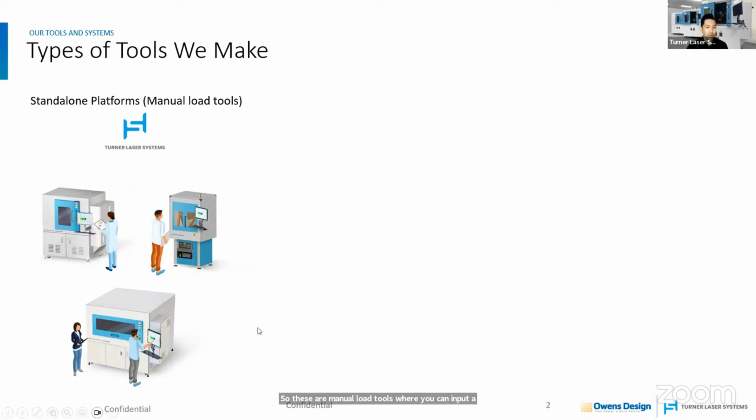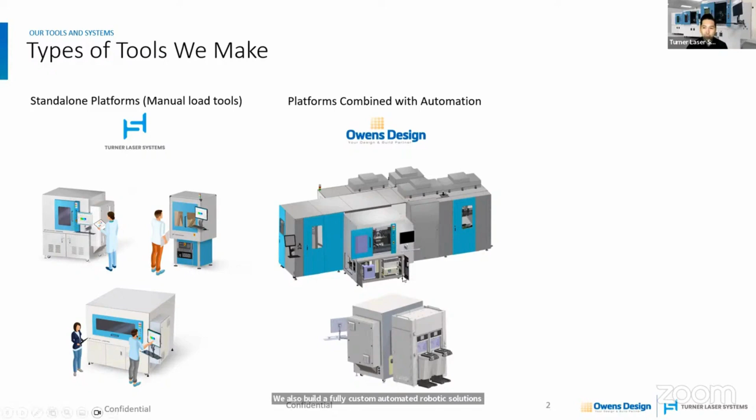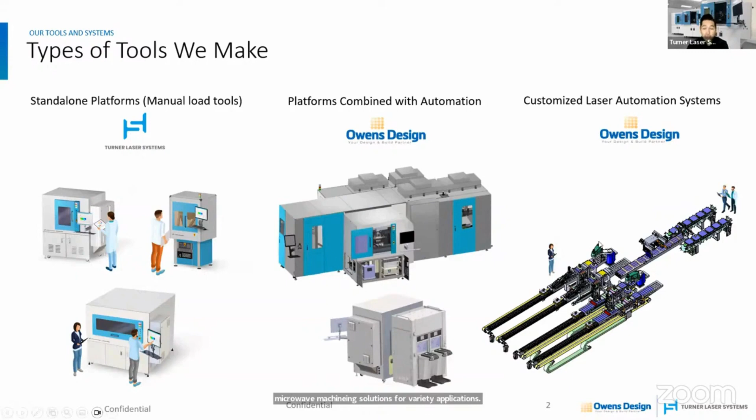Just very briefly, the types of tools we make: standalone laser micromachining tools. These are manual load tools where you can input a wafer or a sheet of material. We work with medical devices and a variety of different materials for micromachining. We also build fully automated systems. Often these standalone tools are then partnered with things like a wafer front-end module if you're working with wafers or solar cells. We also build fully custom automated robotic solutions to be used with these laser micromachining systems, and we can build fully 100% customized laser micromachining solutions for a variety of applications. It really depends on the application as to what type of equipment would be best to support it.

One of the wonderful things we see here in the micromachining space is that it gets to serve a variety of different industries. Based here in the Bay Area of California, we see a lot of work with medical devices, particularly medical implants, and semiconductor applications. Battery is a very hot area right now, where we're seeing a lot of new, very challenging materials to process, and micromachining has a huge role to play in the battery and energy industry as well. For solar manufacturing, particularly scribing and dicing of solar cells, we're seeing a lot of micromachining applications there. And of course consumer electronics, display, VR, AR - they all have manufacturing challenges that leverage micromachining today.

The types of lasers, optics, and processes we work with cover a long list of applications. At Turner Laser Systems, we primarily work with femtosecond lasers and picosecond lasers, so it's great to see a lot of conversation here today on those. But we still do a lot of work with nanosecond, fiber CW, and CO2, often as a complementary laser source to the ultra-fast lasers. The types of processes we do involve many different types, including ablation, cutting, dicing, drilling, etching, micromachining, and welding, to name a few of the core processes we work with, across a variety of different form factors.

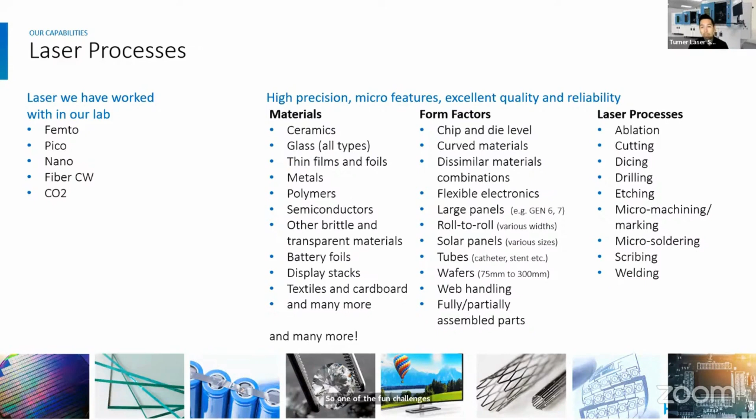One of the fun challenges we have in the automation space is working out how we not only use the lasers, but how we bring the materials and handle them in unison with the lasers, and bring it all together. Something I'll talk about a little differently today, instead of diving deep into the types of applications and processes, is a bit more about the philosophy for how we approach this. I think this is very complementary to the discussions we've been having today on optics and lasers: how do we go from having this application - maybe we were just talking about glass cutting before and using different optics there - to a solution ready for 24/7 industrial manufacturing?

One thing I'd like to share with you today is our phased approach, which we highly recommend using in the industry, because there's often a big gap between a quick test done in a laser lab or applications lab and having the solution ready. We often like to break this into critical phases - really a program management approach where we look at the risks and all the challenges that manufacturing would have. This is a really critical step.

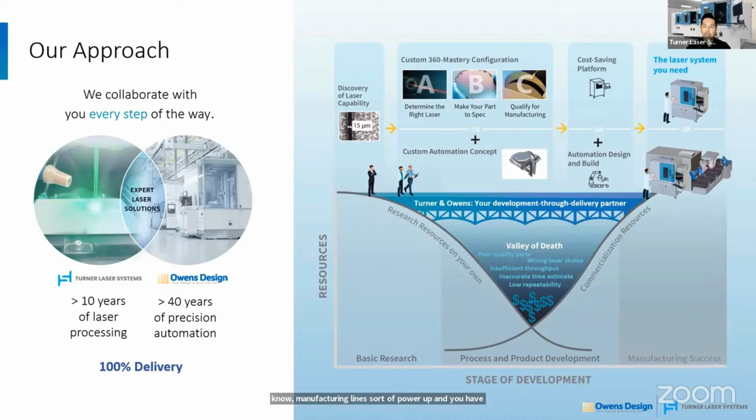We don't just look at the laser processing side of things; we also look at the manufacturing side as well - things like how materials are going to be fed in a manufacturing environment, whether we have tolerances to the materials, different thicknesses of materials as you go from batch to batch. These are all really critical nuances in manufacturing that are important to understand, and we really recommend those of us in the laser industry work very collaboratively with automation. This will be a critical step to avoiding the infamous valley of death, where manufacturing lines power up and the equipment is running, but the laser processes and systems just aren't meeting specification if you don't consider things carefully.

So we have a methodology for doing this at Turner Laser Systems and Owens Design, and this is really based off of a 40-year process that Owens Design has built, where they look holistically at the technology, manufacturing, and business needs of a specific application, and then we break it down into critical phases.

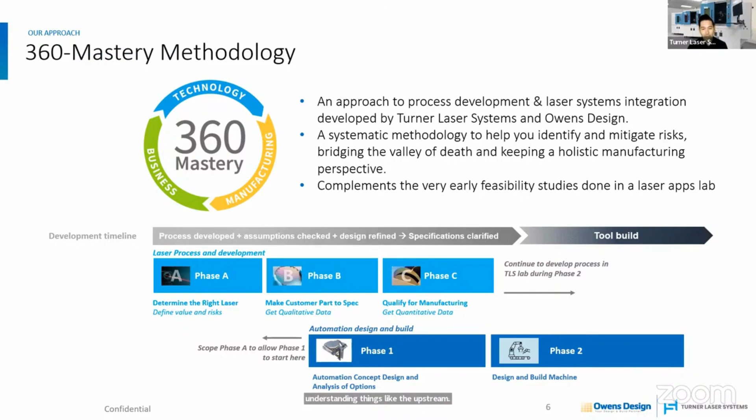Often we'll develop these laser processes, trying different optics, different lasers, different setups, fixturing, airflow. They all make a big difference. A lot of the time we'll develop that in parallel with the automation, and they go hand in hand. A critical thing we've learned in years of working with Owens Design is not to develop process or laser technology in a bubble, but to work collaboratively with your automation teams, understanding upstream and downstream process needs. This has led us to great success in deploying these solutions in large volume manufacturing.

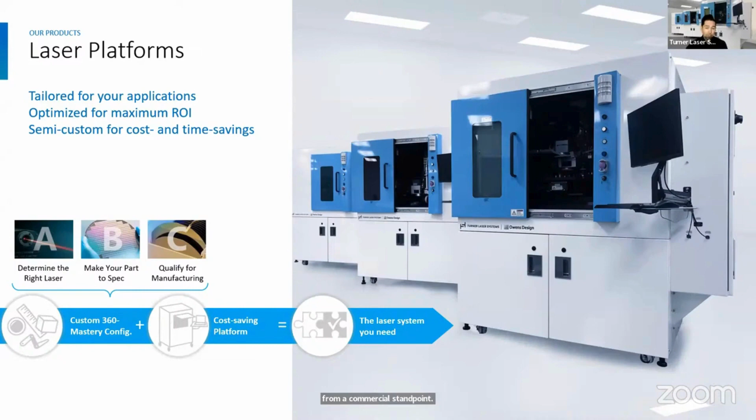Just a little bit about our laser platforms. We're a custom laser machine builder, so we tailor these machines to the application. What we're trying to do is select the appropriate laser optics for the application to maximize the ROI from a commercial standpoint. A lot of the work we do in developing these phased development projects goes into that tailored configuration in all of our machines.

Here's an example of one of the machines. I think Dr. Reddy was asking about glass cutting - this was actually a machine we built that had glass cutting built into it. This was for a medical application, wafer scale, also doing via hole drilling, glass-to-glass welding, glass-to-metal welding, and some ablative processes as well.

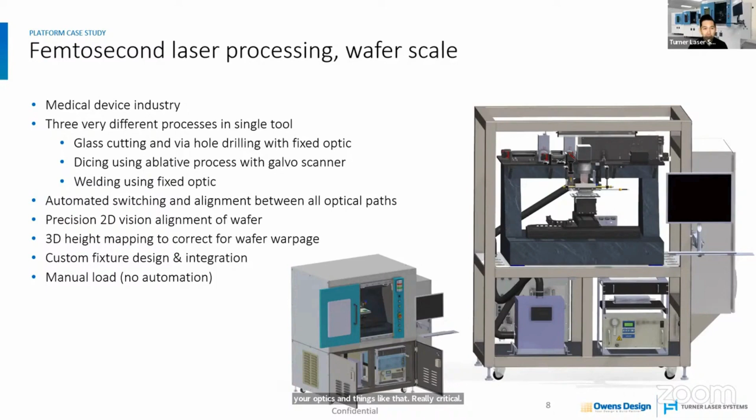Really critical to these types of processes, which we haven't talked much about today, are things like motion control - precision motion, vision systems, sensors, because a lot of times we have to measure the part before we can process it with a laser. We've been talking about high numerical aperture optics and things like that; it's really critical that your laser is in focus and on the part. Bringing all of these technologies together into an integrated solution is really critical in manufacturing.

Besides the laser and the laser process, often being able to feed materials into the laser machine is critical. Understanding things like, am I able to process the material from one side? Am I allowed to flip the material over? Can I handle the material in certain ways? All of these constraints in manufacturing really affect the process and the laser solution that's going to be applicable. So we provide automated solutions for feeding materials into these laser machines as well.

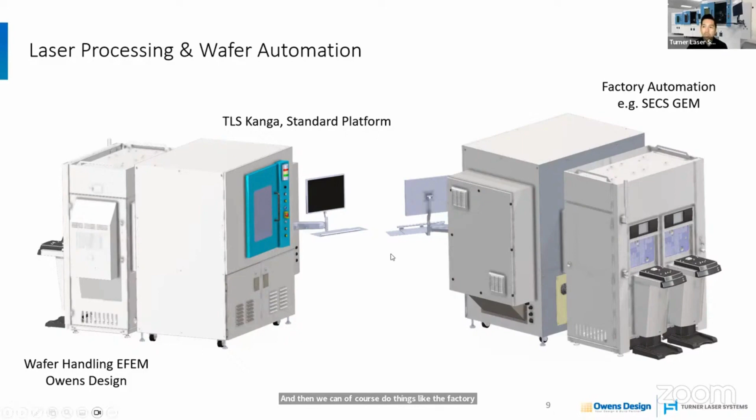We can also do things like factory automation to communicate between our automation systems and the full factory. Besides standard wafer loaders, we can do fully custom automated solutions. This was an example of battery material processing involving robotics, automated loading and unloading, laser cutting with femtosecond lasers, galvo scanners, and coordinated stage motion. Then we had to post-process - cleaning the materials afterwards and removing debris. Most of these ablative-based processes create debris, and there need to be ways to handle, mitigate, and post-process remove it.

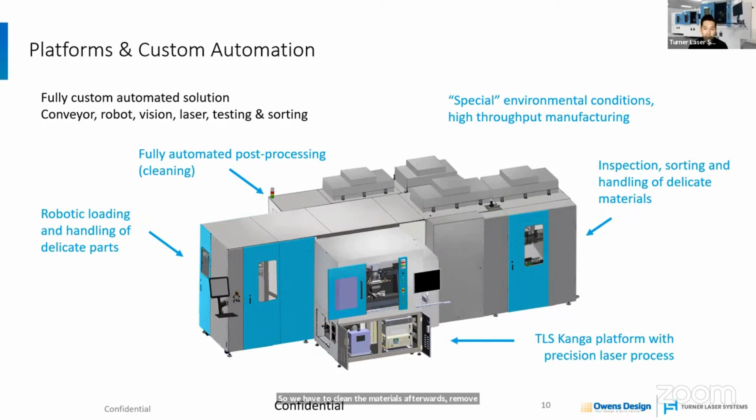So that's briefly about our companies, and nice to meet everyone here. In terms of what we can do for you, we're really looking for partners - customers, users, suppliers - who align with this philosophy of approaching things systematically and methodically, and working through developing things to create turnkey manufacturing solutions.